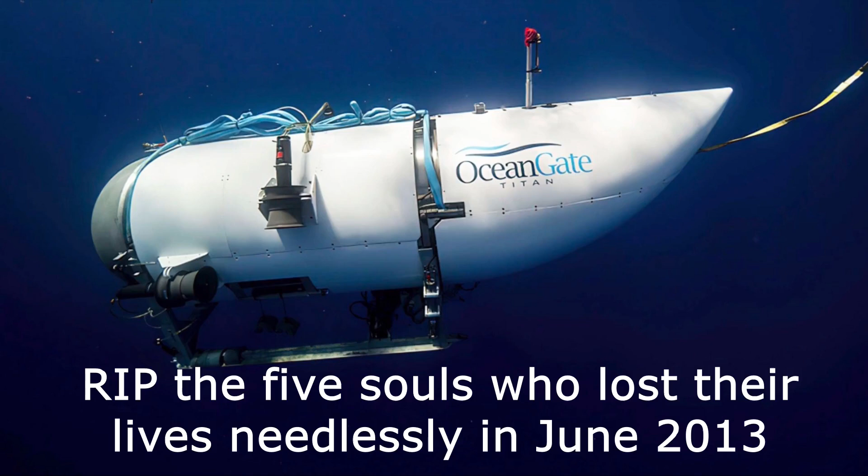When there's been an unexplained structural or mechanical failure, the first thing that most investigators want to look at are the design calculations and the design analyses. And these can often provide an immediate clue as to why the failure occurred.

Now, there's been dozens of videos produced on the OceanGate Titan implosion, but the one thing which I don't think anyone has looked at is how the hull was designed in the first place. And that's what I'm going to do today.

This has only been made possible by the publication of the analysis report through the US Coast Guard hearings which took place last year. The report I'm referring to is the one which was prepared by Spencer Composites back in 2015. They had a design and manufacture contract for the first composite hull, although this wasn't actually the hull which failed, which was manufactured by Electro Impact. However, we have no evidence that the report was updated to reflect any difference between the two hulls.

Now we have here the design basis in tabular format. We've got two columns here, what they call the optimum, which I take to mean the target value, and the limit, which I think is the minimum acceptable value if the target can't be achieved. The values at the top have all been specified by OceanGate, and the values at the bottom have been specified by Spencer Composites. So you see we're aiming for a maximum operational depth of 6,000 metres, and you'll note that the Titanic is actually only at 4,000 metres, and this with a factor of safety of 2.25.

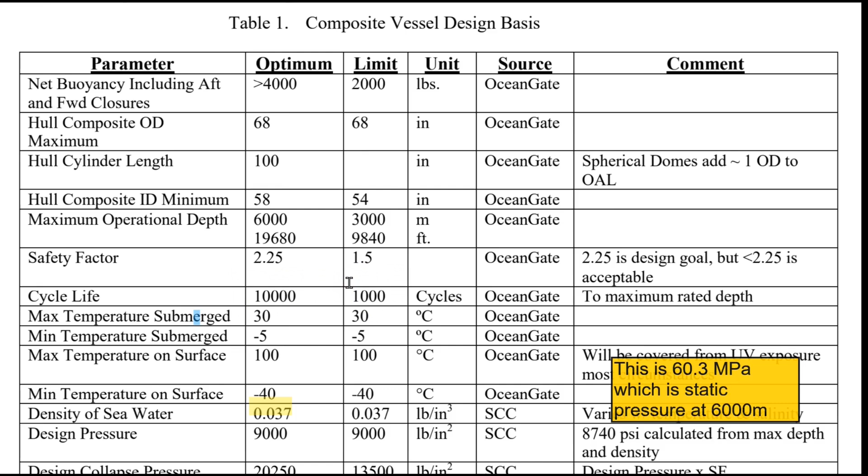And we're aiming for 10,000 dive cycles with a minimum acceptable value of 1,000 dive cycles. This equates to a design external pressure of 9,000 psi or 60 megapascals with a collapse pressure of 20,000 psi, which is 9,000 psi multiplied by a factor of safety of 2.25. And clearly, if we can achieve all of this, we've got a hull which will meet all relevant design requirements.

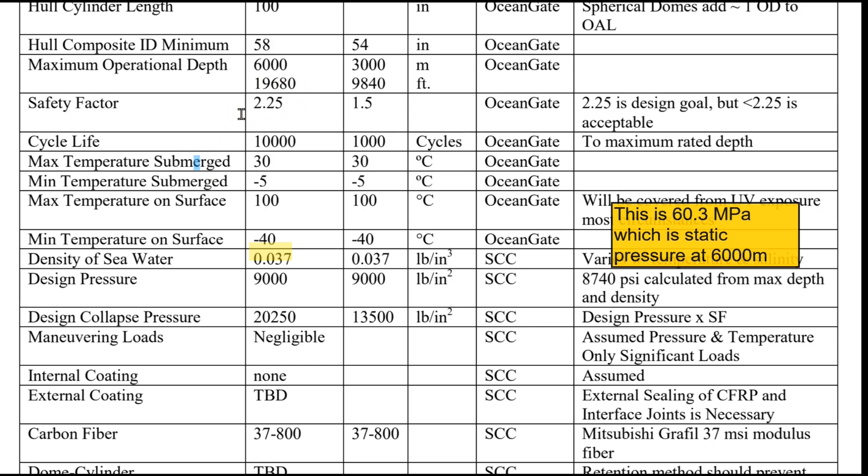So what did they do? Well, as expected, they did a detailed finite element analysis of the hull. This is because the FE method is by far the most powerful and most widely used analysis method. But the computational requirements can be very high, and these analyses can be very onerous. And so Spencer Composites sought to make economies where they could.

Instead of doing a huge three-dimensional analysis of the complete hull, they made the assumption of axisymmetry. Now what this means is that at any cross-section through the hull, you assume that the stresses and strains are identical all the way around the circumference. I'll come on to this assumption later. But the bottom line is, instead of doing a detailed three-dimensional analysis, the model reduces to 2 dimensions with a huge reduction in the computational requirements. Furthermore, because of the symmetry of the hull about the central cross-section, they've only had to analyse one end of the hull. Overall, a very economical approach, and certainly completely justified for the initial analysis.

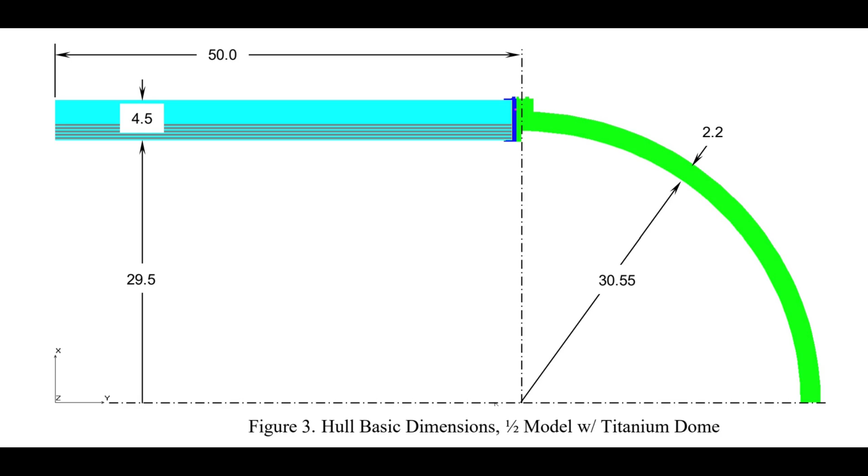So let's talk about the form of construction of the carbon fibre hull and the associated modelling. Now, the basic units are the longitudinal plies, which are formed by a single layer of pre-preg carbon fibre, and these are about 0.8 millimetres thick. And they, in accordance with the overall stress distribution, they go 2 for 1. So for each horizontal ply, they got 2 going circumferentially, and these are about 1.6 millimetre thick.

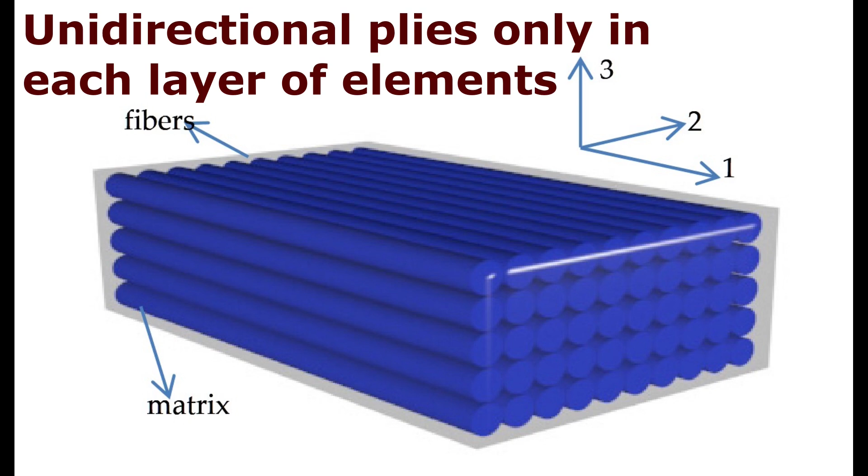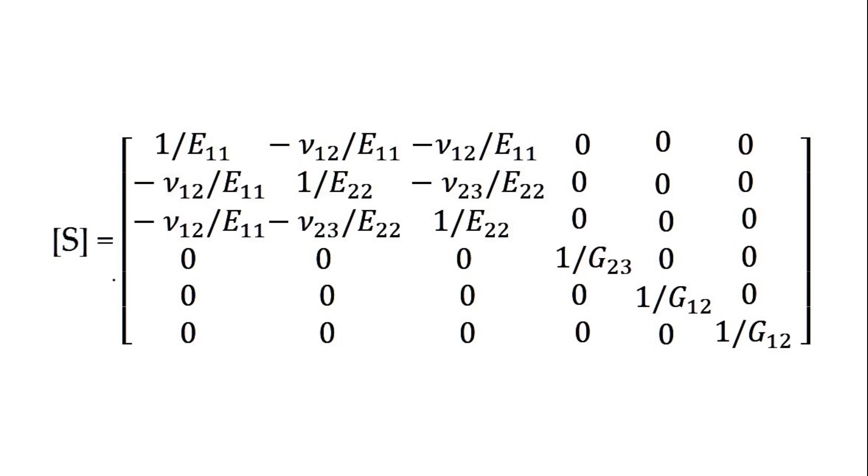Each lamina is modelled by a single layer of finite elements. With this form of modelling, each element only has plies running in a single direction. And the compliance matrix, which gives the relation between the strains and the stresses, takes this form. I do assure you that if you have fibres running in more than one direction, this becomes infinitely more complicated.

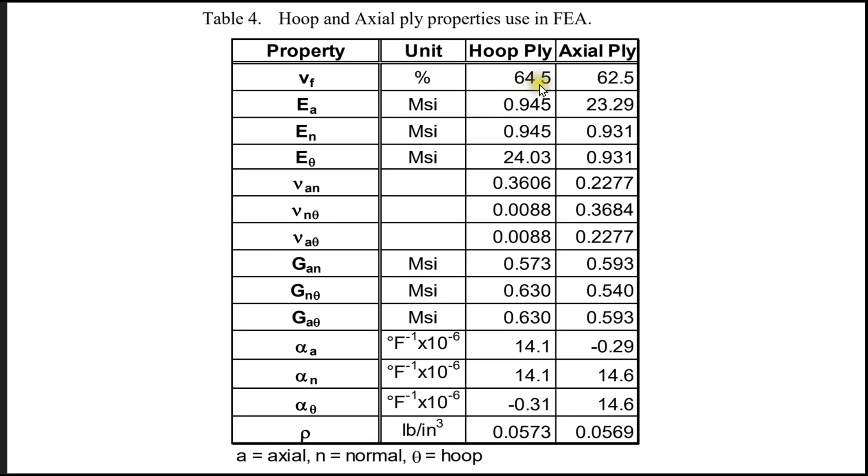And if you know the mechanical properties of the carbon fibres and of the resin, you can synthesize the elastic properties which you need for the analysis. So here, for example, we've got the elastic moduli. Here we've got the Poisson's ratios, and here we've got the shear moduli. And if you count it up, you'll find that you've got 5 independent values.

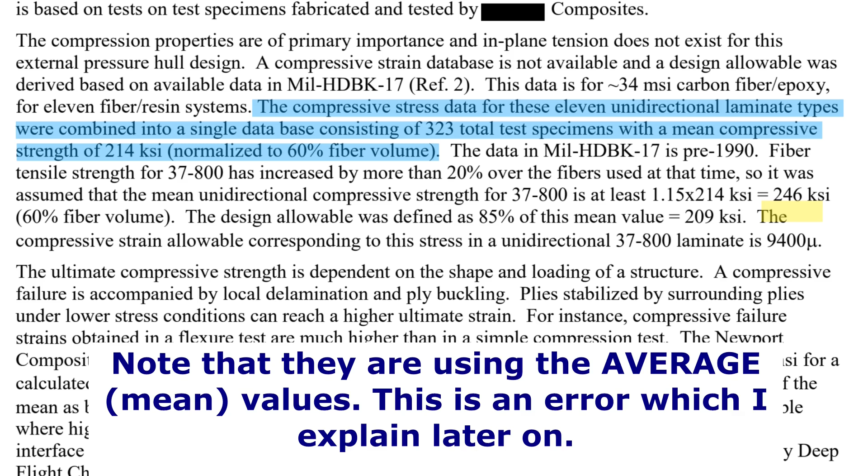We've got the relevant material properties to perform the analysis, but at what point is carbon fibre going to fail? Unfortunately, we don't have adequate test data for these selected materials. So what they've done is they've gone to a US military document which was prepared in the early 1990s, which has a database of test results. They've extracted relevant data and averaged it, and they've come up with a failure stress of 214 KSI.

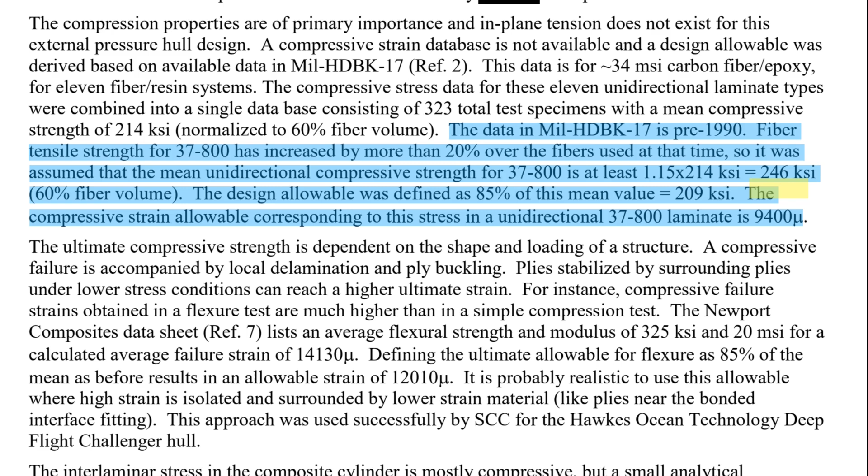They then argue that material properties have been improving over the years, so you can add 15% to it. And so they quote a failure stress of 246 KSI, which corresponds to a failure strain of 9,400 microstrains.

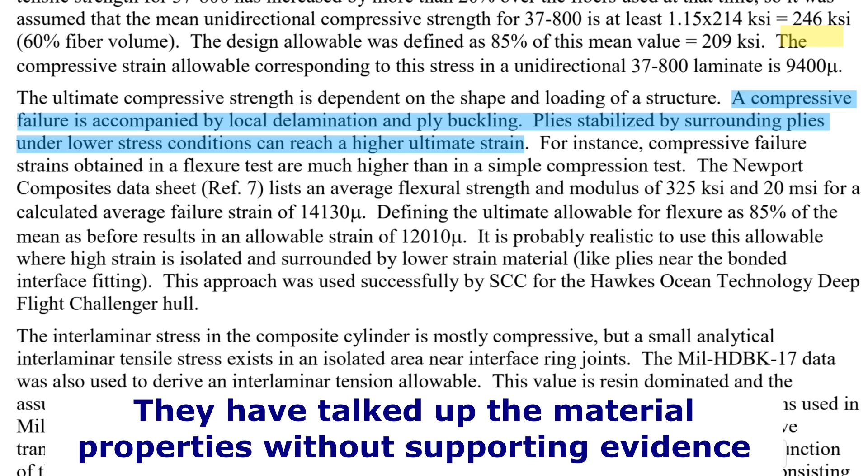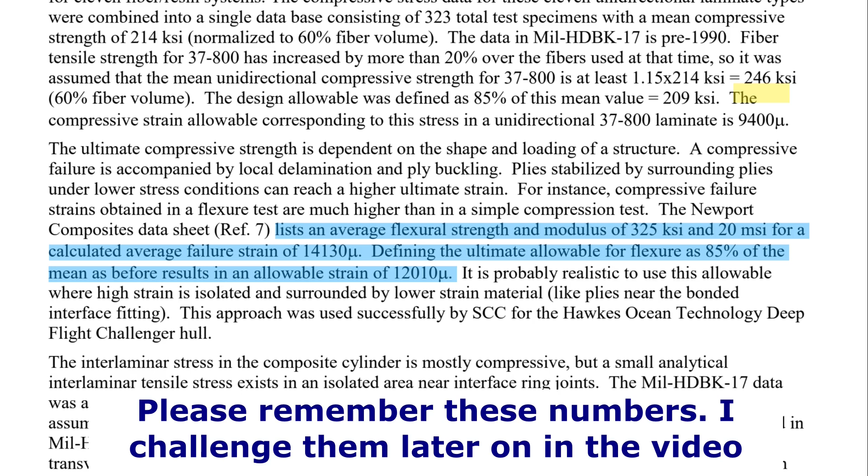They furthermore argue these failure values are applicable in areas of uniform compression, such as on the centre line of the hull, but if the highest compressive stress is reduced because there's a bending element, you can take higher failure values. They quote a failure stress of 325 KSI and failure strain of 14,000 microstrains, and argue that this value should be used at the interface between the carbon fibre and the titanium ring.

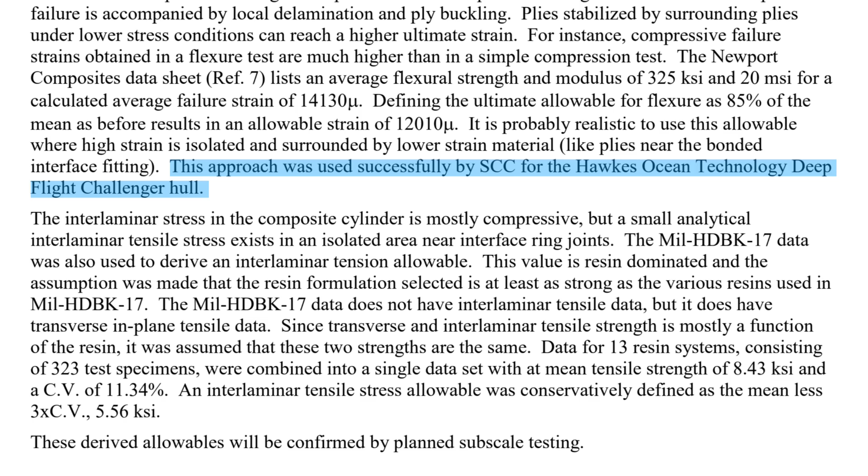They furthermore say that this was used successfully by Spencer Composites for Steve Fossett's Hawkes Ocean Technology Deep Flight Challenger hull. Well, that sounds very impressive, but to the best of my knowledge, this hull has never been used and has never been pressure tested, so I'm not sure how you can claim that it was used successfully.

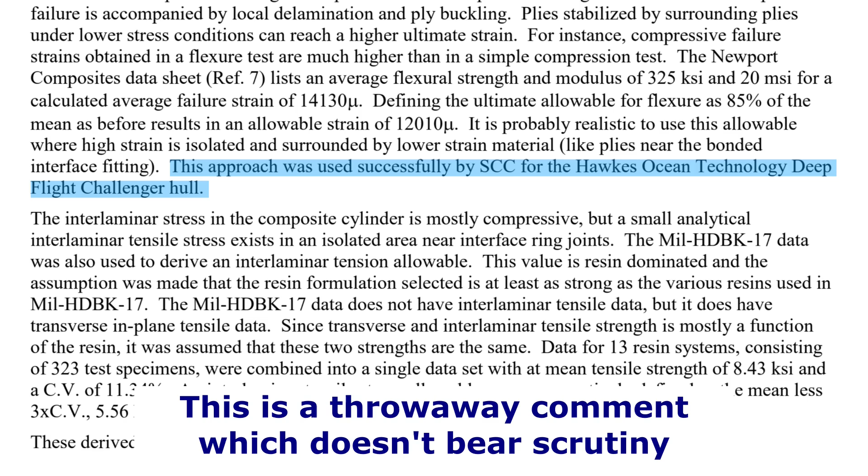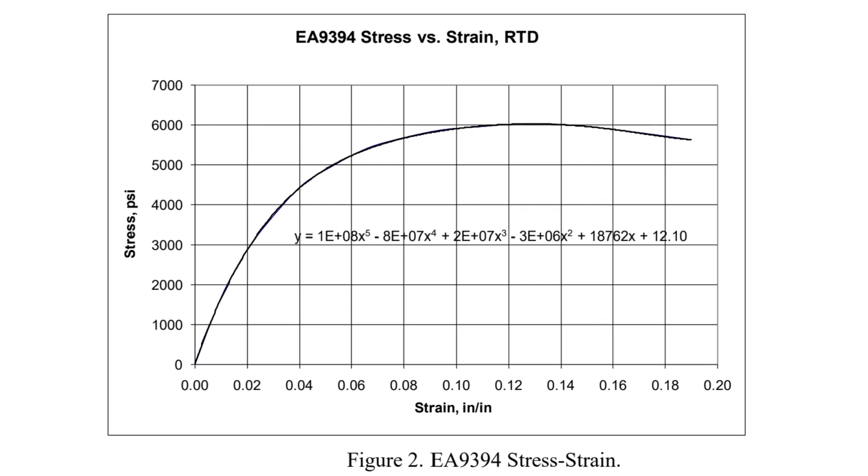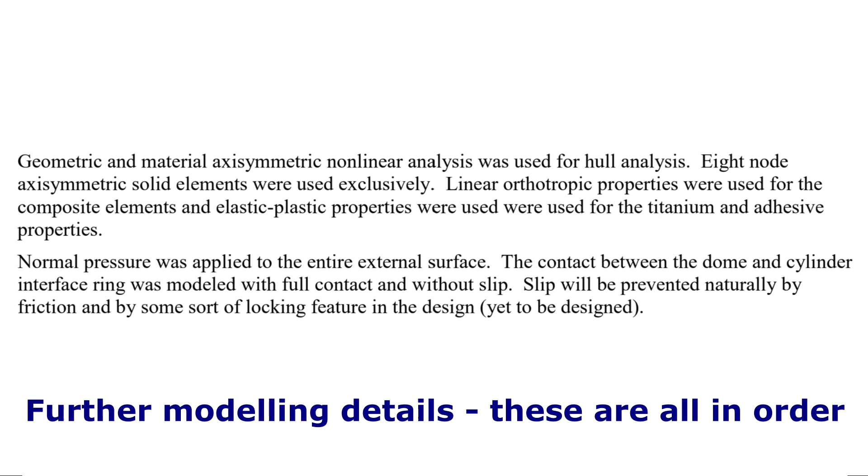Whilst it's assumed that the carbon fibre acts elastically up to the point of failure, full material nonlinearity is modelled both for the titanium end domes and for the adhesive. Furthermore, geometric nonlinearity is assumed, so the change in geometry of the hull as the loading is applied is modelled. So to summarise, they've done a detailed nonlinear analysis of the hull and end domes using axisymmetric elements.

Using axisymmetric elements will give good information about what's happening at the interface and through the thickness of the hull, and it will also pick up any buckling in the axial direction, but it can't model hoop buckling, and this will need to be studied separately.

For the material properties, they've used third-party data from a database compiled about 30 years ago. They've applied their own correction factors, and this is okay for the preliminary analysis. However, as you get into detailed design, you'll need to make up test specimens using the actual selected materials. And beyond that, when the hull itself is manufactured, you need to take test specimens from the offcuts at the end of the hull.

So let's look at the results for the carbon fibre hull. What they've done is applied an external pressure of 9,000 psi, which corresponds to a dive depth of 6,000 metres, and they've computed the strains at all points through the model. They've compared this to the estimated failure strain to compute a factor of safety.

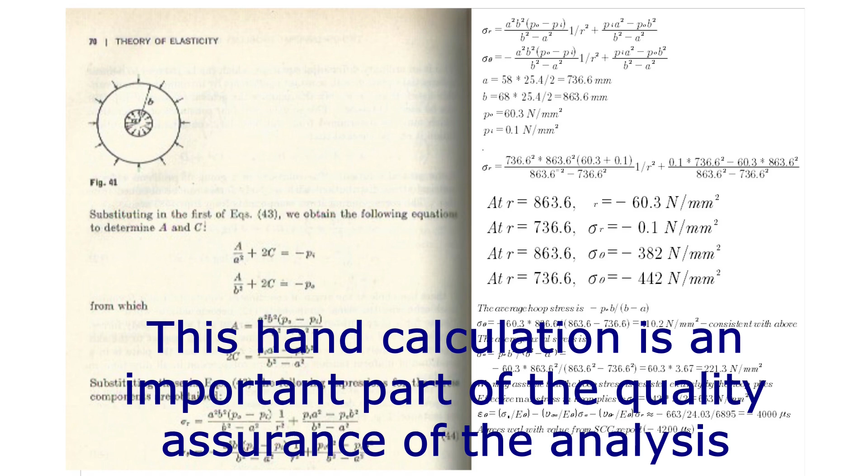Not good. And whilst on the subject of quality assurance, it would help if they showed displaced shape plots, if they reported stresses rather than strains, and if they reported the support reactions. It would make it much easier to verify the results. However, my little hand calc here predicts maximum strains on the inner surface of 4,000 microstrains compared to their number of 4,200, and on that basis I'm not worried that there are any basic errors.

Now, the next subject is very important: how they've computed the material failure in the analysis. This falls into two parts, the first being the assumed strength of the material. Because they didn't have actual test data based on production samples, Spencer Composites went to a publicly available database. They did their own desktop study and came up with failure stress and failure strains, and the highest number they used was 325 KSI, for the axial failure stress in the hull.

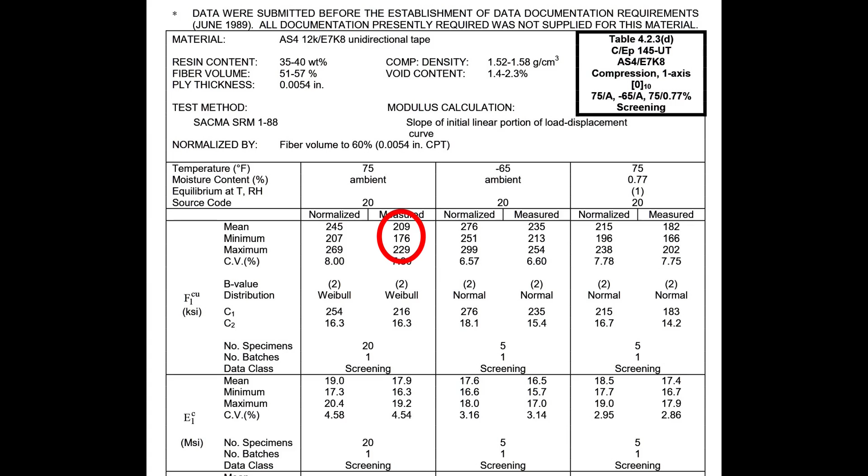If you have a look at the database, you see a wide range of test examples, all tested under either uniaxial tension or uniaxial compression. But if you look at some of the data sheets, you see much lower numbers. Taking one at random here for an AS4 unidirectional carbon fibre laminate, there's a range of failure stresses, with the low number being 176 KSI, about 55% of the value Spencer Composites used for design. So my first question is, how did Spencer Composites decide which values to use? Did they merely select the data which gave the high numbers?

But the second point is you never ever use the mean failure stress when characterizing a material. What you do is compute what's called the characteristic strength of the material, almost always defined as the mean minus 2 standard deviations. This means 97.5% of the values will lie above the characteristic strength, but 2.5% will lie below, and this is taken care of through the safety factor. So I have huge questions about the failure stress assumed by Spencer Composites for design purposes.

We've measured the failure stress, failure strain under uniaxial loading, but what guarantee is there that this number will also predict failure in real world conditions with much more complicated stress situations? There is no guarantee. Composite materials are complicated and they've got a number of individual failure mechanisms, any one of which can cause final failure.

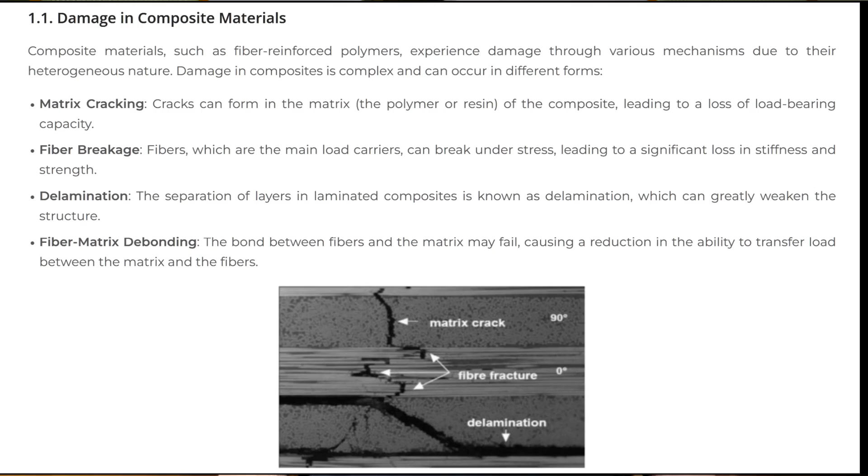For this reason, a number of failure models have been proposed which try to look at these individual failure mechanisms. I show you here one such model, widely used, the Hashin model, as programmed into Abaqus.

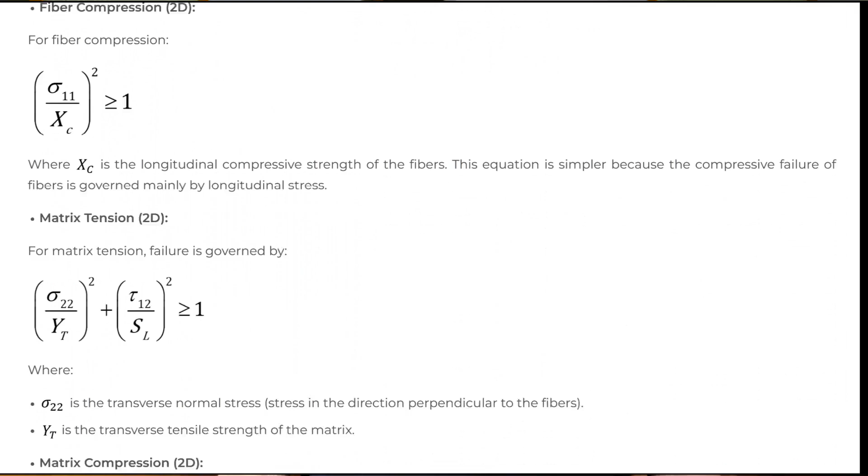Now this model works very well under certain conditions, but much less well under other conditions. There's a number of other competing failure models, and they're much the same. For this reason, some years ago, there was a worldwide failure exercise, and the organisers made available properly documented lab test results.

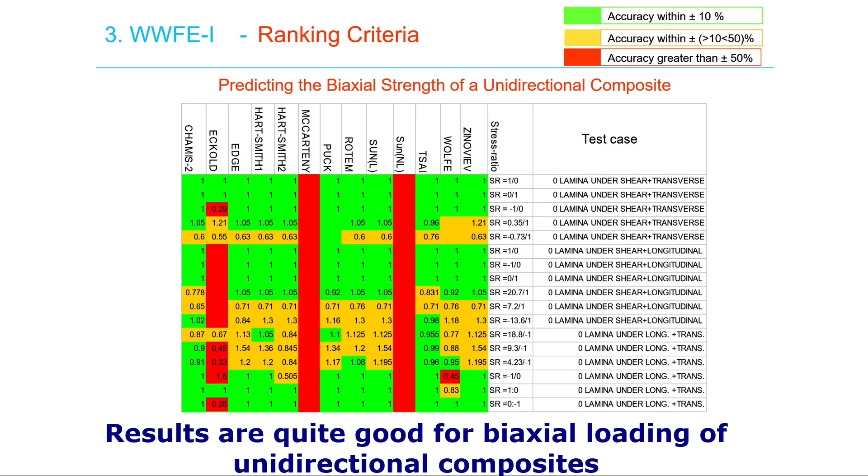Individual researchers were invited to benchmark their failure models against the actual test data. There were 20 test cases made available, and some 12 or 13 individual models. We show the results here in tabular form, and where there's a green square, theory and test data agreed to within 10%, but the red squares were out by more than 50%. And there's an awful lot of red squares, aren't there?

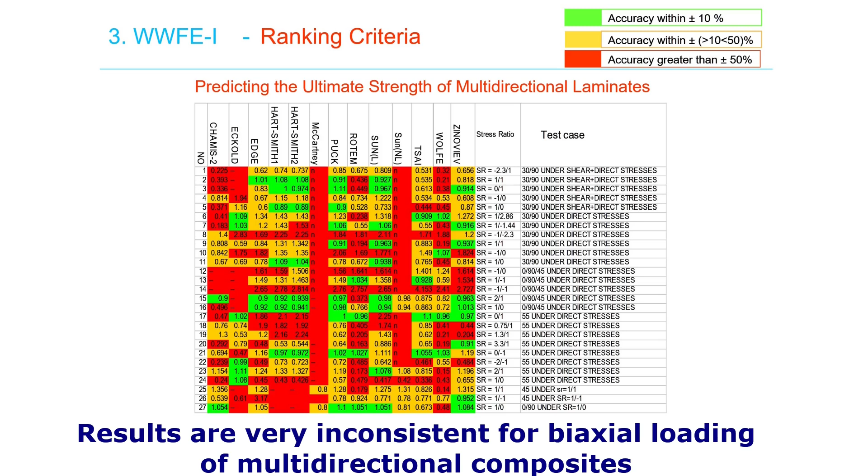I can assure you that all of the failure models were much more sophisticated and advanced than simply using the uniaxial failure stress. So for Spencer Composites to use this criterion without any justification or benchmarking is completely unjustifiable. I personally have zero confidence in the computed failure load from the analysis report.

We now get to what I consider to be the nub of the matter, and that is that the designers decided ahead of time how the hull was going to fail by static collapse without buckling. They put all their efforts into looking into this, and they didn't even consider other failure modes. Now it's not for the designers to decide how the hull is going to fail, the hull will decide that for itself.

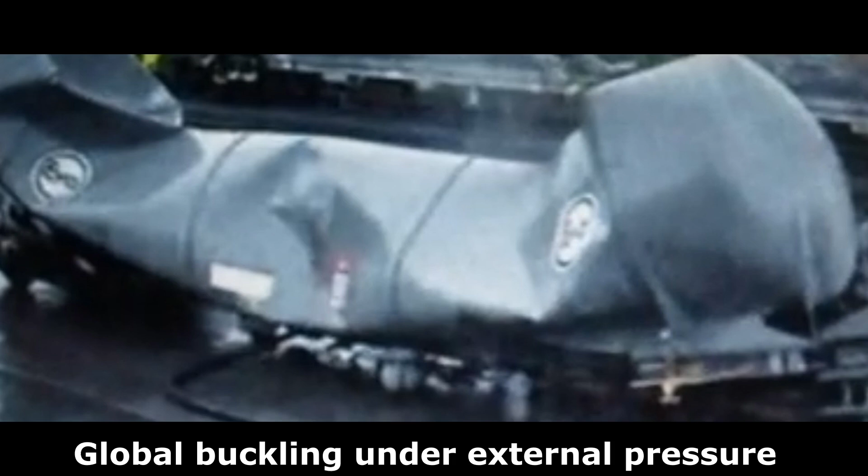Some of these other failure mechanisms, or what we call ultimate limit states in engineering, include various types of global buckling. You've got local buckling, material breakdown under repeated loading, material degradation under environmental effects, creep, local mechanical damage, and no doubt two or three more which I haven't even thought of. All of these need to be looked into individually.

Now I'm not going to speculate about how the hull actually failed. Plenty of others have done that. But I will point out the obvious facts that the hull did survive a number of dives down to 4,000 metres, albeit I think with a very much reduced safety factor compared to what the passengers thought, and that it failed on a subsequent dive. So clearly there was some form of degradation ongoing.

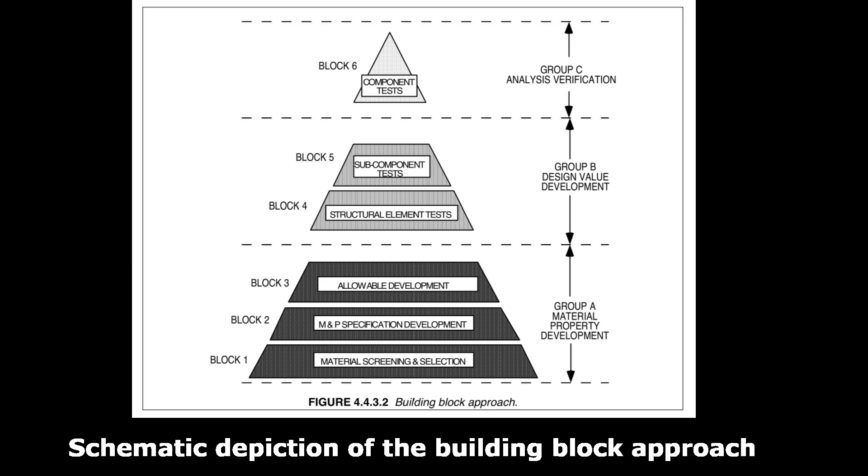Now the design criteria said that the hull should be good for 10,000 dives. The designers didn't even look into this, nor did they mention this omission in their final report. So what was needed was a structured and comprehensive program of technology development to get to the bottom of all of these issues, conducted under a documented protocol, such as the building block approach used by the US military in developing composite structures for military aircraft.

Now this would have taken at least a couple of years, and it would have required money which is way beyond OceanGate's resources. In summary, Spencer Composites produced a preliminary report and came up with their estimate of the factor of safety of the hull against collapse.

I think the report was very amateur. I think they made a number of very dubious assumptions, and I think that their predictions were very optimistic. But for me, the biggest error was in their report: they didn't highlight all of the assumptions and all of the things they didn't look at, and it made it easy for the client to misuse the report.

On OceanGate's side, they accepted the report unquestioningly and with open arms, because apparently it gave them the answer they were looking for, and I think they genuinely convinced themselves that the hull was super strong and had been designed conservatively. To me, this was yet another blot on the reputation of their appalling engineering department.

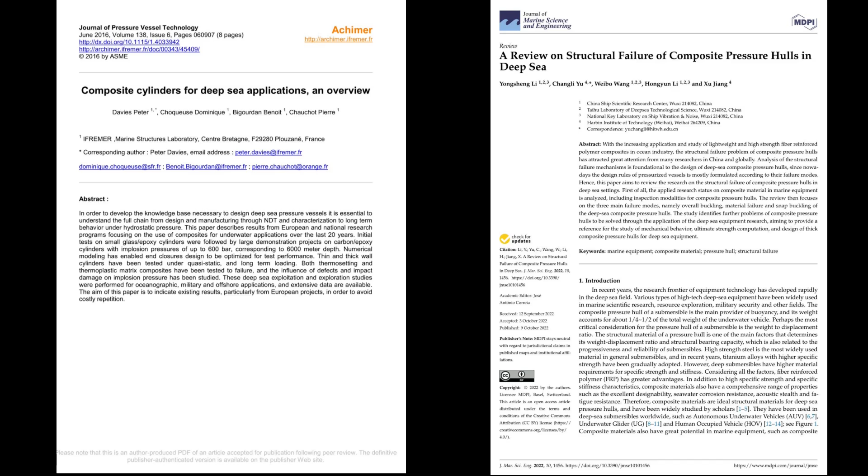For those of you who are interested in knowing more about this subject, I would recommend reading these two excellent review papers, both of which are available for free on the internet.